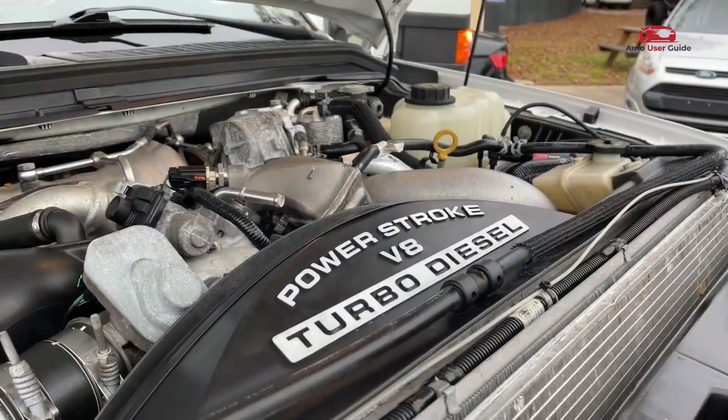Are you trying to locate the fuse box in your 2025 Ford Bronco Sport? Wondering where each fuse is placed or how to read the fuse box diagram correctly? In this guide, we'll walk you through the exact location of the fuse box and provide an easy-to-understand diagram to help you identify the fuses for various systems.

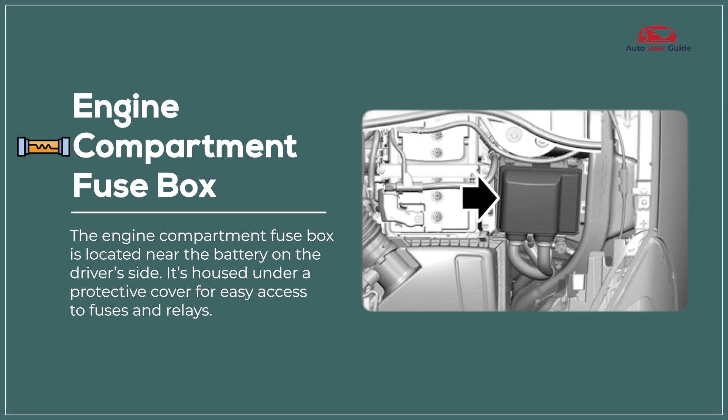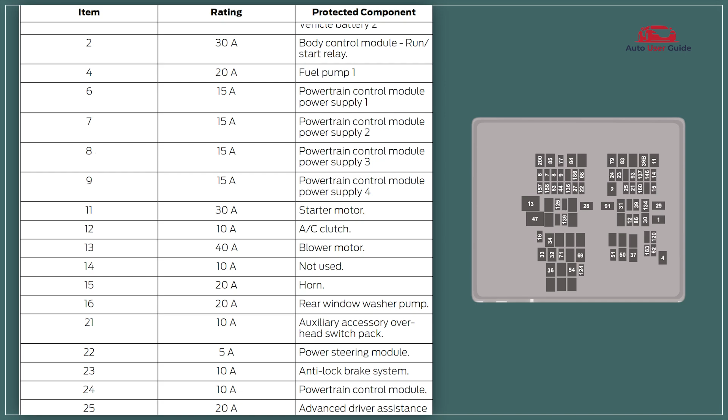Engine compartment fuse box. The engine compartment fuse box houses high amperage fuses and relays that control critical systems like the ignition, cooling fans, headlights, and ABS. It's designed to protect key engine and safety components from electrical faults.

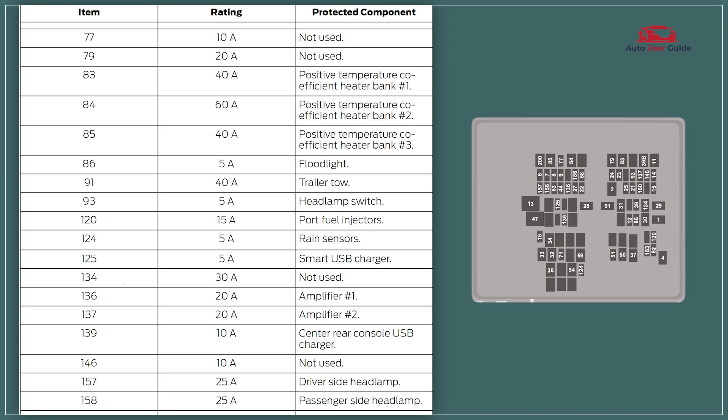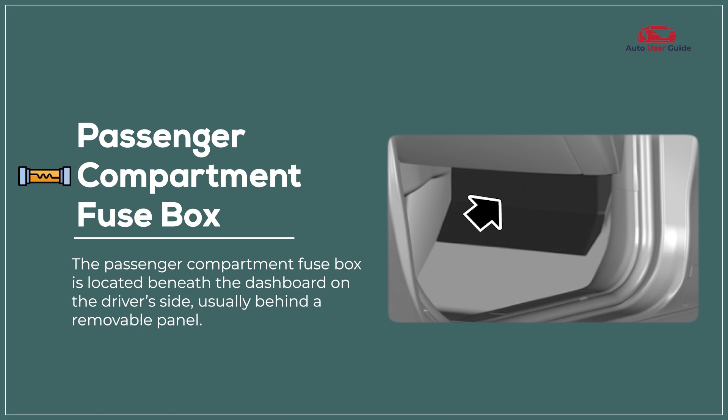Passenger compartment fuse box. The passenger compartment fuse box contains fuses that manage interior electrical systems such as lighting, infotainment, climate control, and power accessories. It's typically located behind a panel under the dashboard for easy access.

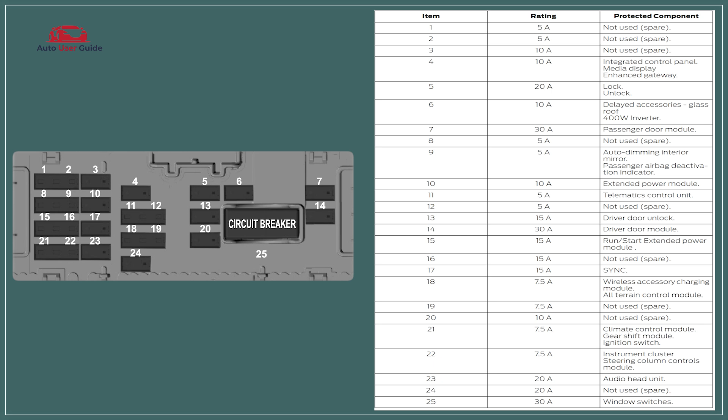Types of fuses: blade fuse, standard blade fuse, mini blade fuse, maxi blade fuse, micro 2 fuse, micro 3 fuse, J-case fuse.

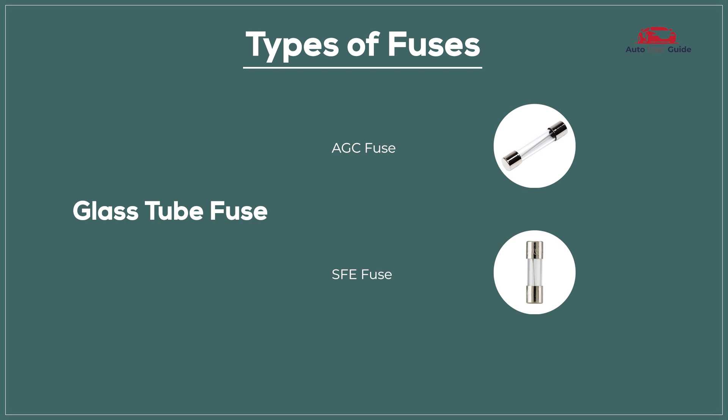Glass tube fuse, AGC fuse, SFE fuse. Ceramic fuse, Bosch fuse, DIN fuse.

PAL fuse, low profile PAL fuse, standard PAL fuse. Link fuse, mega fuse, high amperage link fuse.

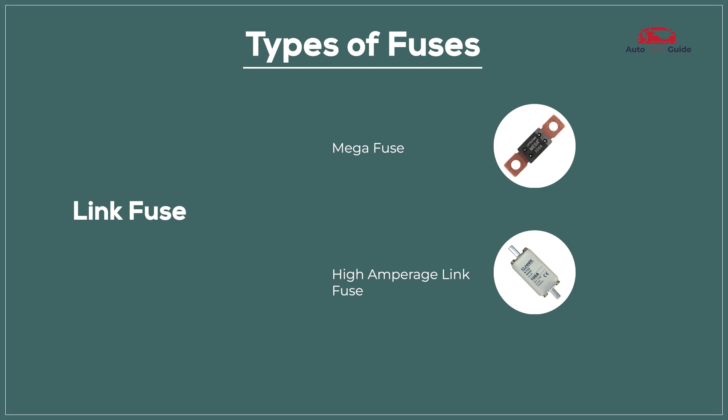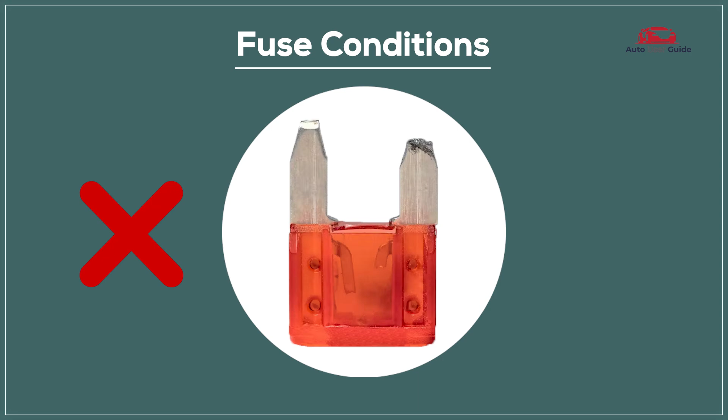Fuse conditions. Blown fuse: a blown fuse means it's no longer functioning and needs replacement, while a perfect fuse is in good working condition and performing as expected.